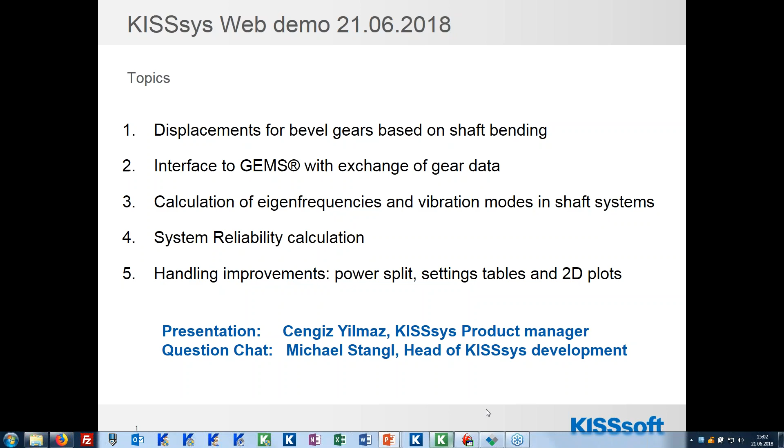So now I would like to start with the first point, displacement for bevel gears based on shaft bending. If I go to KISSsys now, let's open the single bevel stage model. Here you can see, if I go to boundary 1, this is the input boundary where we have the pinion shaft. I have here a speed of 1000 RPM and a torque of 50 Newton meters. So in total, I give a power of 5.236 kilowatt to this gearbox, to the pinion shaft.

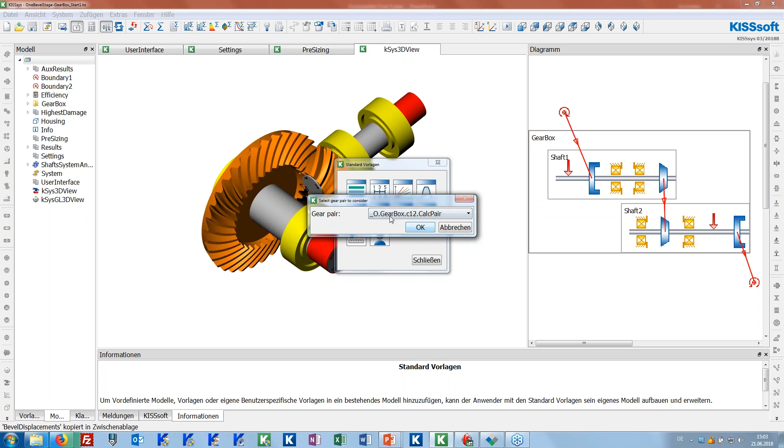And now I would like to calculate the displacements which are resulting just from the bending of the shafts. To do that, we have a new template under the standard templates in KISSsys. You can find it here. It's a new icon, which we can just load into our model tree. The first window appears to select the stage which you want to consider. Since we have just one bevel stage, we can select single bevel stage from the list. And the selection here can be closed.

And then you will see an interface like this. In the first part, in a header, you can set the graphical settings. This means draw the deflection lines. If I say yes, this will create the deflections in the actual 3D viewer. Then you can scale these deflections with a scaling factor, which you can set here. And there is the type for the values. You can have either the Gleason standard EPG values or the Klingelnberg VHJ values. And according to your selection, we convert these values below. So let's switch back to Gleason EPG.

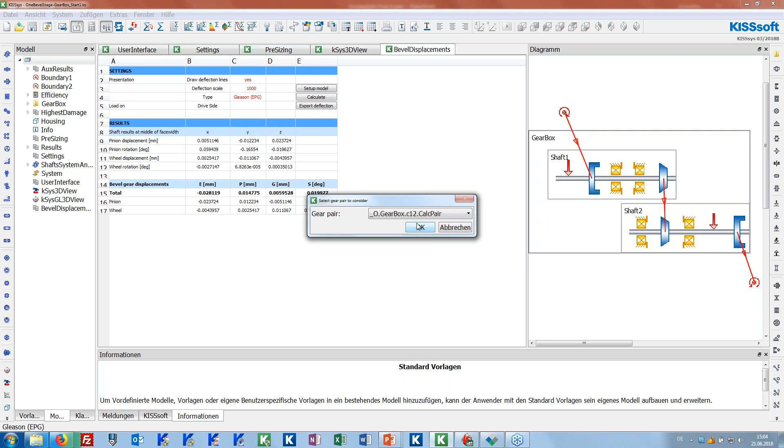And again, if you did a wrong selection in the beginning, you can select the stage again here. And with the calculation, you can run the displacement calculation now. It's not changing because I already did it before. So what we can see in general is, for the different shafts, in X, Y, and Z directions, the displacements for the pinion shaft and for the wheel shaft, and also the tilting around the X, Y, and Z axis. And these values are automatically converted to the EPG values according to the sign conventions. And these values are ready now to transfer to GEMS, for example.

Now, just a short additional information. What does it mean if we take these X, Y, Z values? From where do we take them? If I go to one of these shafts, let's say to the pinion shaft, here it's already written that it's the results at the middle of the face width. So, just to make it clear, if I open the shaft calculation, we have the middle of the face width of this bevel gear, and in the center of the shaft, we check the displacement of this point in X, Y, and Z direction, and also the tilting at this point around the X, Y, and Z axis.

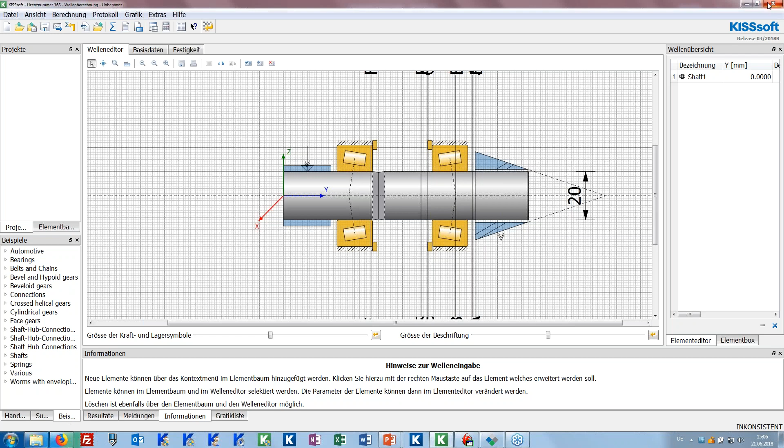Okay, then if you check the 3D view, since we activated here the deflection lines, you can see with the scaling factor how it would deflect. We can see clearly the pinion shaft deflection and also a bit the bending of the wheel shaft.

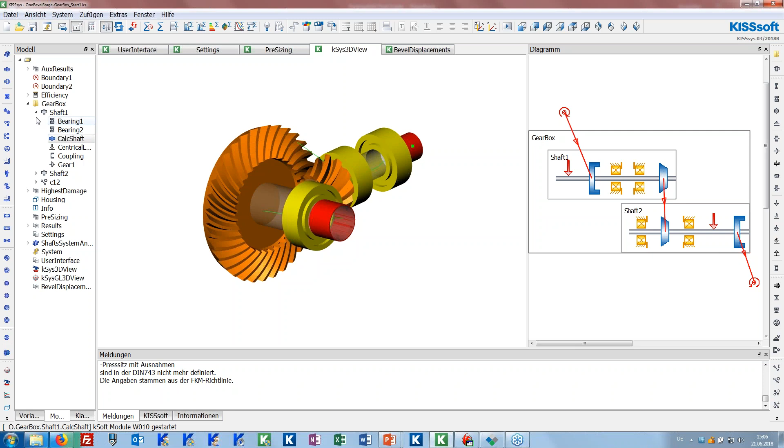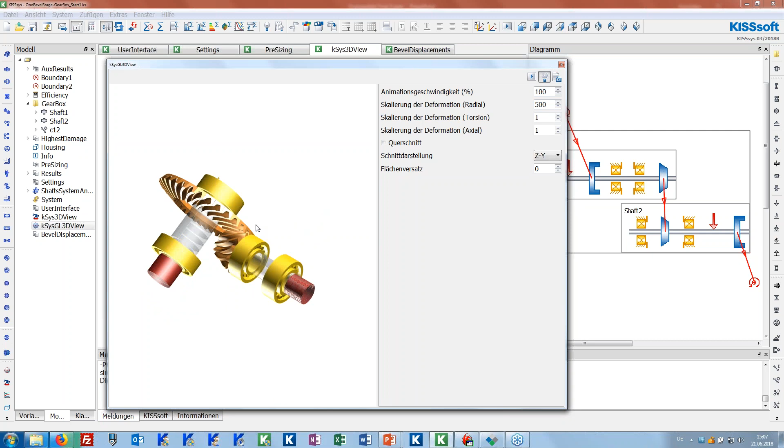Let me show it in the new 3D viewer as well here, which is a bit easier to handle. So in the properties of it, I can activate, for example, the radial displacements. So you can really see here this shaft, and also if we have some axial displacement, you can see how the shaft moves axially as well.

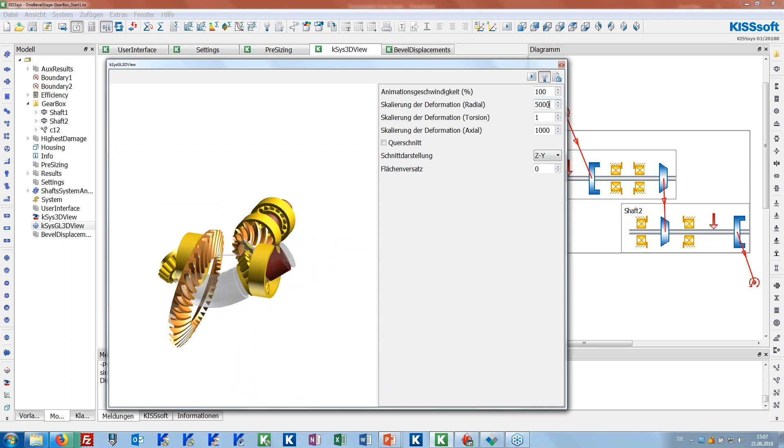Maybe 1,000 times. So this creates really big. Yeah, we can see the bending here clearly. Okay, that's regarding these bevel displacements. For sure, if you would change temperatures of the housing now, you would see the effects as well here in these displacement values.

So, as I mentioned before, these displacements are needed if you want to do the contact analysis maybe in GEMS for a bevel stage. And now I come to the second topic with this introduction, which is the interface to the Gleason software GEMS. In GEMS, I already started here the calculation software from Gleason, and if I open the sample job here, which can be the hypoid stage, for example,

Then you will see from that hypoid stage the geometry values, and I exported already a predefined file here from GEMS, which I would like to import to KISSsys. So to do the import, first of all, you need to add the template related to this for this interface. You can find it on the standard templates here.

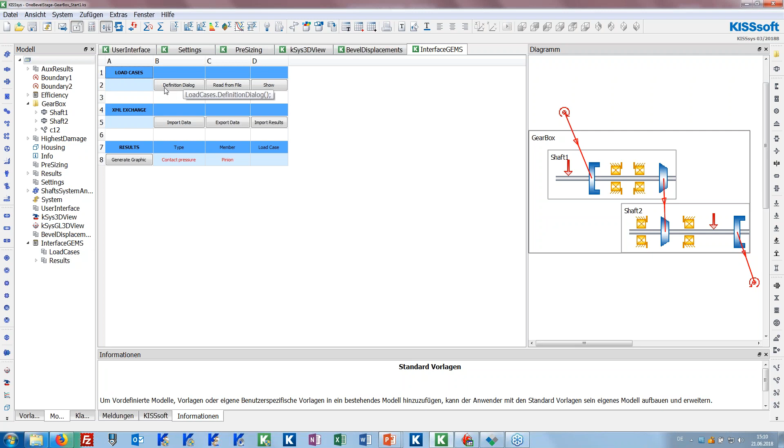If you don't have the bevel displacement template before you add it, then it will automatically also create it together with the interface GEMS template. And first of all, we have to define the loads here in KISSsys. So that's the first thing you have to do. We have the two bins, for example, absolute values, hours, and the speed is defined at the pinion shaft, the torque as well.

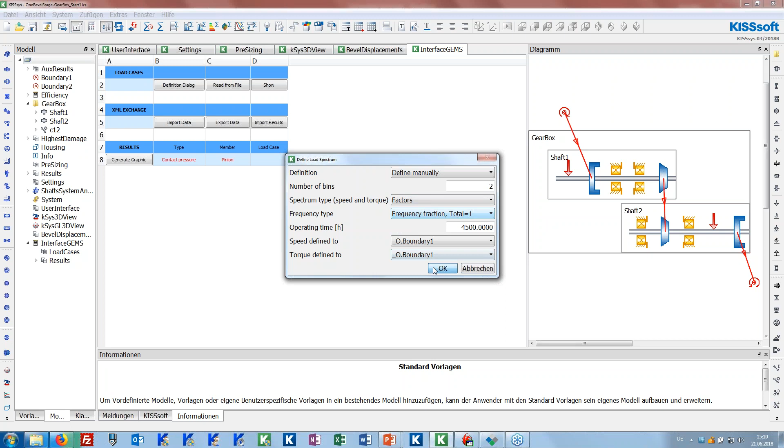And let's say I would like to use factors and fraction from the total lifetime. Okay. And I have two conditions. For speed, I say speed and torque. I use the same input conditions with factor, just multiply with factor 1. And here for the torque, I use the coast condition. That's why I would like to have the negative speed and negative torque. And for the drive condition, I have the positive values.

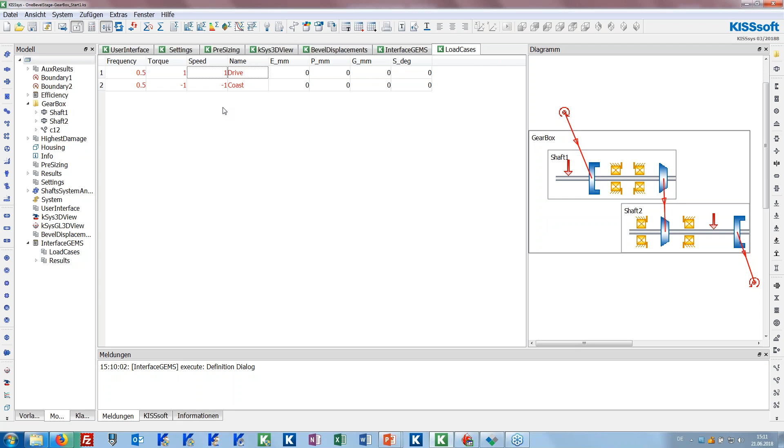So this is just to check what happens when different flanks are in contact and different flanks are driving from the pinion shaft. Okay, so these are our loads, drive and coast conditions. And the next thing would be the exported data from GEMS to import it to KISSsys. So I already have an exported example from GEMS.

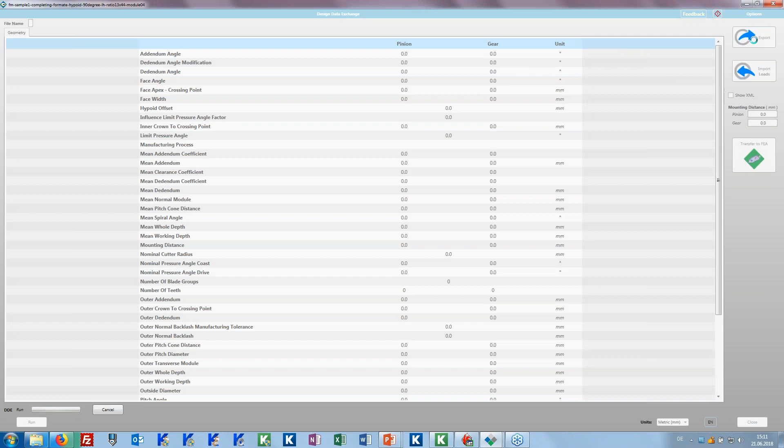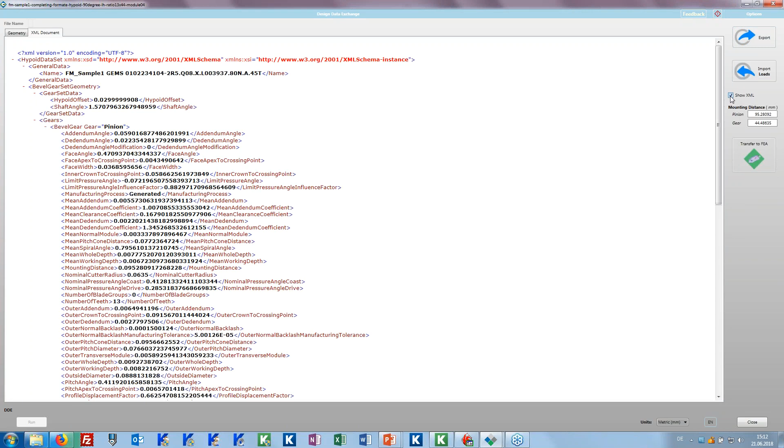This is this one which I just exported from here from the design data exchange tool. I did an export from here already, which we could also do again. So this is this one actually. I already did the export. So you can also see how it looks in XML format, this example from GEMS. And now I have to import it to KISSsys.

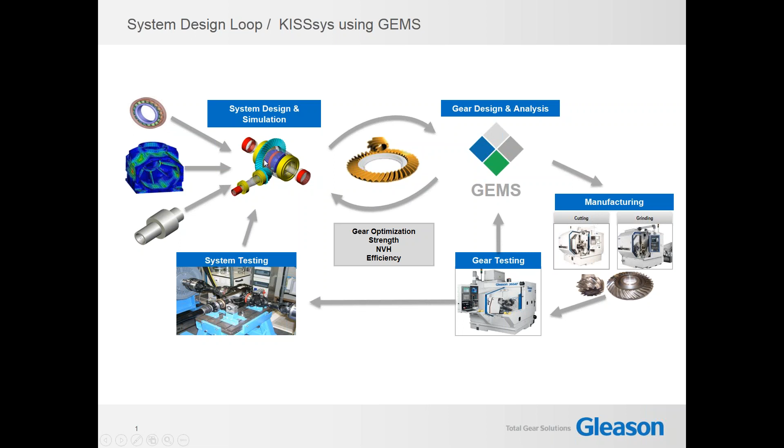And I would like to just show you now, we exported the geometry at the moment from GEMS, and I would like to import it to KISSsys and do the calculation and export it to GEMS then. So here I would like to import this data from GEMS. And this is, let's say, the exported file.

And you can already see it can be that some settings in KISSsoft have to be changed accordingly, because now I'm importing a hypoid stage and my model was not ready for this stage, so some parameters have to be changed. So here it's the calculation method, and I just say okay, yes.

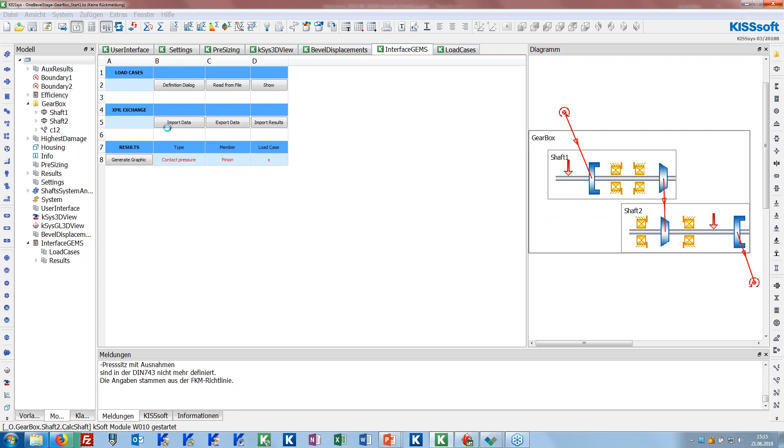And what's happening now is KISSsys is reading in this data, doing the calculation with the defined load cases, and exporting also automatically the load cases together to this file in an XML format, as you see here in the message.

Maybe let's switch to English, it's much easier to understand for you.

So now we exported this data, and I can go to GEMS and import the loads again back. This is the same file which is overwritten from KISSsys together with the loads. And if I import this file, I can find back the loads here as well. And I can run here the contact analysis in GEMS. So I can start the calculation, but this can take some time depending on the number of load cases.

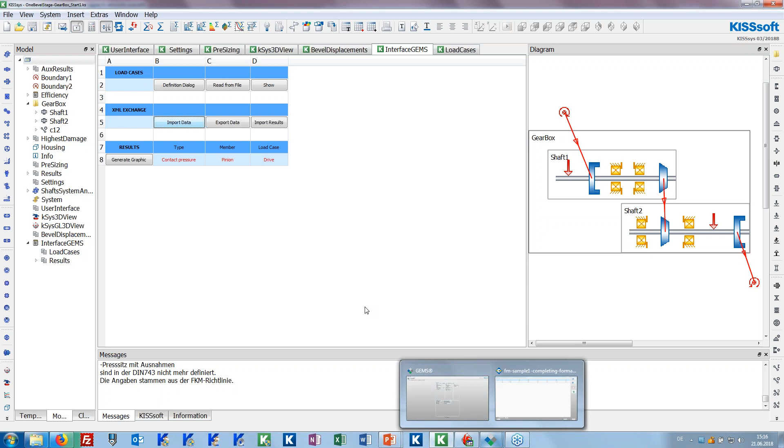I have already a result file created, which I can already import to KISSsys. So it depends always on the geometry and on the cases. So to make the time shorter, I would like to import the results from an already calculated file, which is the same geometry, just calculated before. And for the import of the results, you can go to import results in KISSsys and check here the exported XML file, which is coming after the calculation in GEMS.

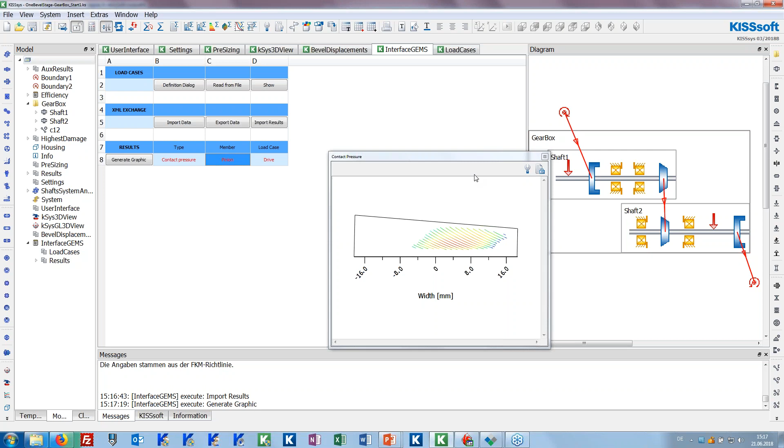And we have some graphics generated automatically, which you can check here with generate graphic. First of all, we can see the contact pressure either from pinion or from the wheel, and for the different load cases like drive or coast, what we defined here in our load cases table. So let's check the contact pressure on the pinion. This is on the flank for drive condition of the pinion. Then if I check it for the wheel, it looks the following way.

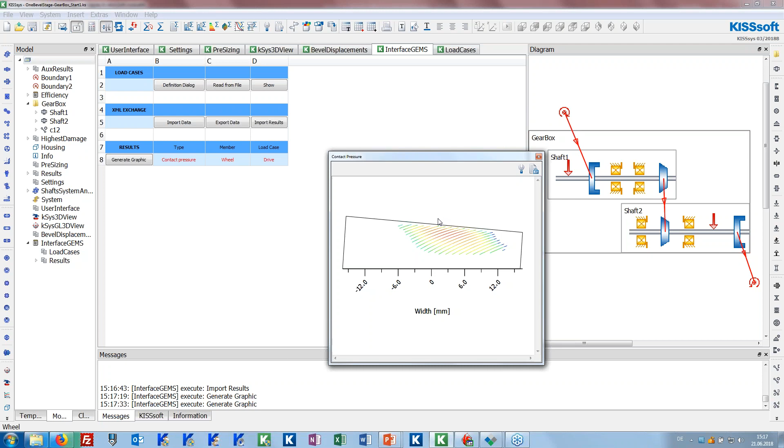And it's again important to mention these loads which we had before can be a bit too low for this geometry. This is just to show you a bit how the communication works and what is possible for this interface.

And another point is we can show the sliding velocity in 2D, or, which is also interesting, the mesh stiffness or the transmission error here at the last point. Maybe we can make it bigger for the wheel for drive condition here over the mesh, and also the same for the pinion for drive condition. And let's check the coast condition. Yeah, looks slightly different.

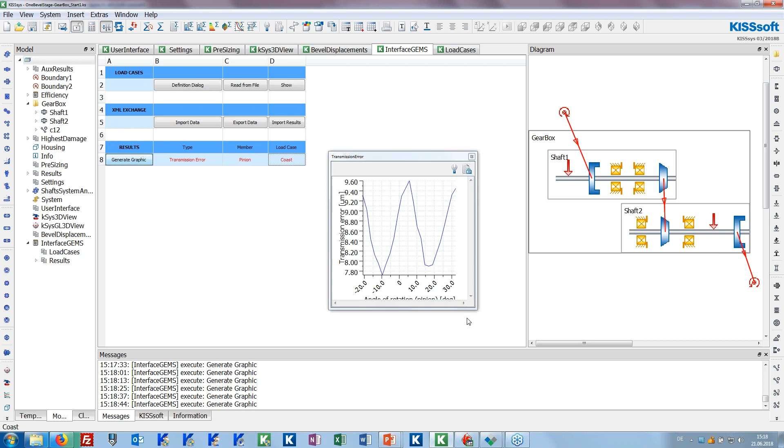So that's actually what we mean with the interface between KISSsys and the Gleason software GEMS. As you see, there are many possibilities. You can also just define the geometry in KISSsoft and export the loads, and then do the contact analysis again in GEMS. Or you can also do it the way we did it.

You can import the load from GEMS to KISSsys and do the calculation by exporting the loads to GEMS and importing again the results. The motivation for this example is that it's a hypoid stage. We cannot do the contact analysis of a hypoid stage in KISSsoft, but with this interface, you are able to export it and do the contact analysis in GEMS and check the results again in KISSsys.

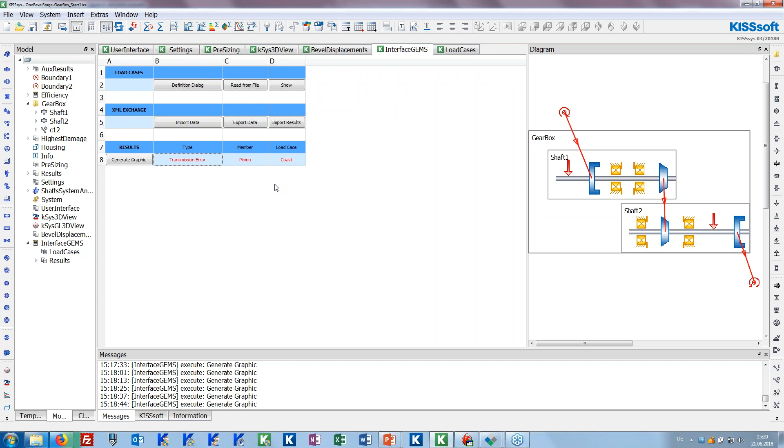Then I would like to switch to the third point, which is about the calculation of eigenfrequencies and vibration modes in shaft systems, where I would like to open one of the example models here, which will be a 4-speed transmission gearbox, so that we also have something for the automotive industry.

This will be a 4-speed gearbox where we have the second speed in, so we will see details in the model. I would like to show you the modal analysis of such a system. We also have 2 other points we could show, but these functionalities are in beta state. So I would like to show you just the modal analysis; the forced response and the generation of the Campbell diagram are in beta state, so they will not be shown today.

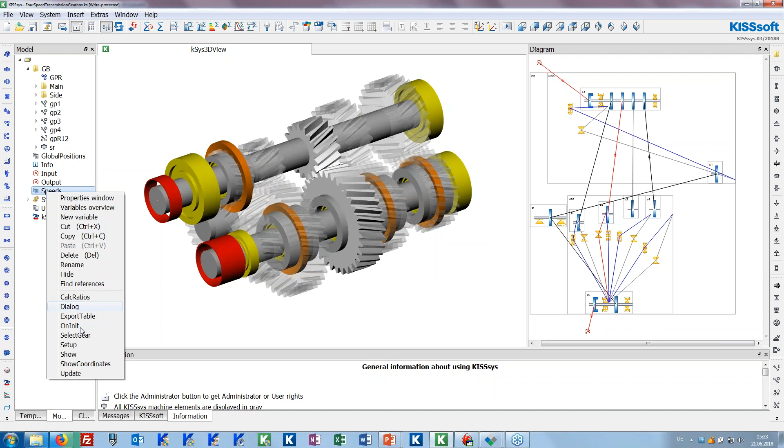So here again we have the 4-speed transmission gearbox. Let's check the loads: we have 47 kilowatts here, 3000 RPM, 150 Newton meters, and at the moment gear number 2 is in, it's this stage. Now I would like to do the eigenfrequency calculation, the modal analysis of such a system.

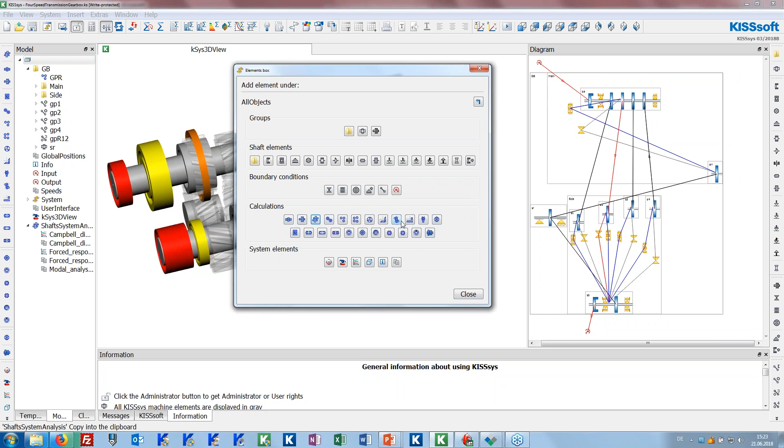You have the option to either use the calculation elements on the left hand side here and drag and drop them to the root directory, or you can go to the element box, check the calculation elements, and find the KISSsoft shaft system here. I will just click on the root directory and click on the specific element to add it to my model. I close it, and now to perform the modal analysis, we can right-click on this element and just use modal analysis.

I would like to calculate the first 4 eigenfrequencies. Regarding the meshing stiffnesses, you have the option to take them from the ISO calculation, or the detailed option to use the contact analysis results, or you can say the meshing stiffness is infinite, or not take into account the stiffnesses of the meshes. So let's use the ISO calculation as a reference, and I would like to also see the axial and bending modes, not only the torsional vibrations. Gyroscopic effects I would like to neglect at the moment.

Okay. So then the software is starting the calculation. Depending on what you selected here, this can take some time. If you calculated just the torsional vibrations, you would have it in a couple of seconds. This can take around half a minute now because of the coupled vibrations, because of the bending and axial modes in addition.

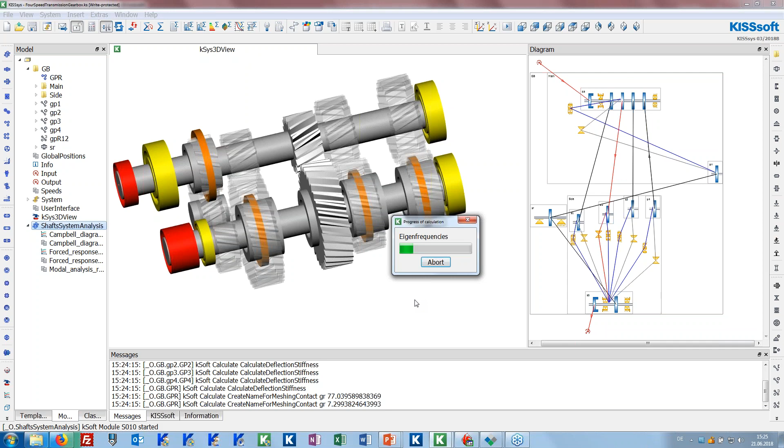The model we use in the background includes the inertia and stiffness of the shafts, the stiffness of the bearings, and the gear inertia and meshing stiffnesses of the gears. All together it is vibrating, and we are calculating the eigenfrequencies of such a system.

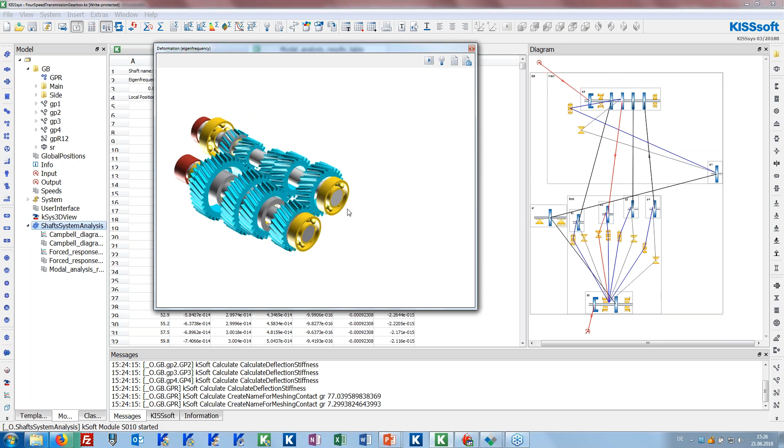So calculation is finished. And the first thing we can do is check it visually in this 3D viewer. And if I open the settings of this 3D viewer, I can show you the calculated results here. So the first is a gear body vibration. Then this is the first mode. Then second mode is

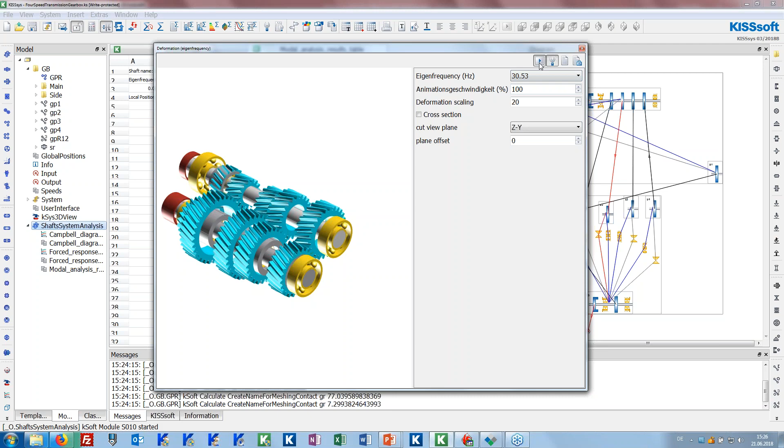we have 30.53 Hertz. And let's check what we have here. We can see that we have just the torsional vibrations here mostly. Even if I do the scaling, put it higher, so it's more torsional. Quite less bending here maybe, but in general it's more torsional vibrations.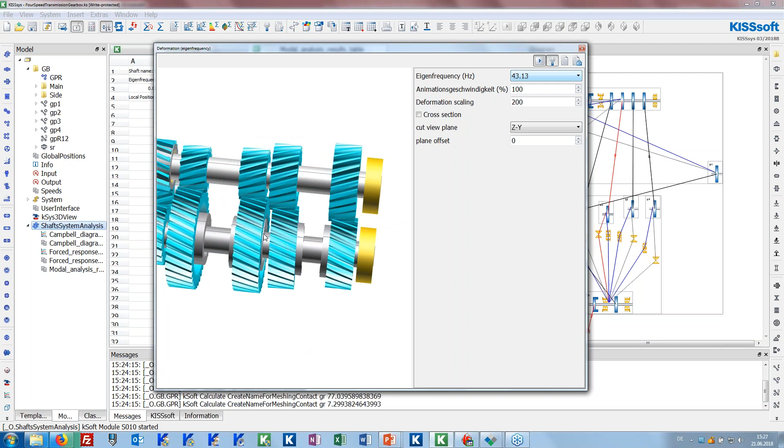Then let's see the third eigenmode, eigenfrequency. So we have here the bending is stronger for these gears, and in general we have torsion and bending together. For the last one, similar, but the bending mode is stronger here for this gear. Okay, so this is something you can analyze graphically or in 3D.

And then what you also have is the amplitudes of these different modes. So we have for the different shafts and eigenfrequencies, over the shaft, the different amplitudes. So the displacements in x, y, and z direction, and also the rotation around this axis. So you can plot them manually if you like. We have also some plots.

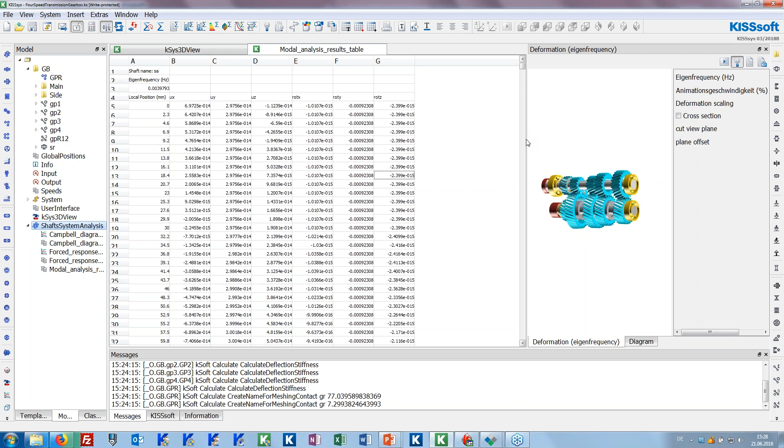We can also create the plots automatically here, but I would not like to start this plot generation at the moment, which takes also some time. So what I would like to show you is also the summary report of this modal analysis calculation. So I don't start the 2D plots, but the report in general.

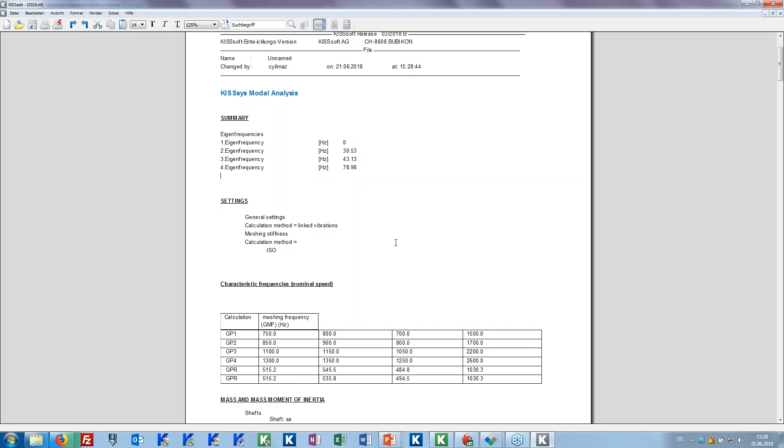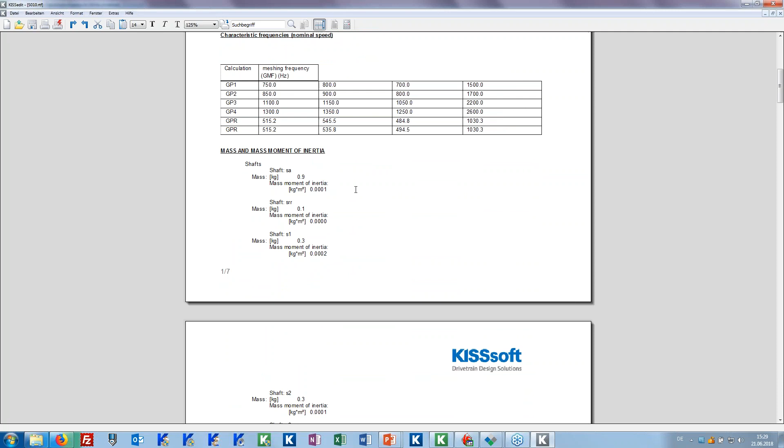And if I make it a bit bigger, you can see here the summary, which we already have seen in the settings of the 3D viewer. We have the eigenfrequency values there. Then we can see the characteristic frequencies for the different pairs. Then we have the mass and moment of inertia for the shafts and for the gears.

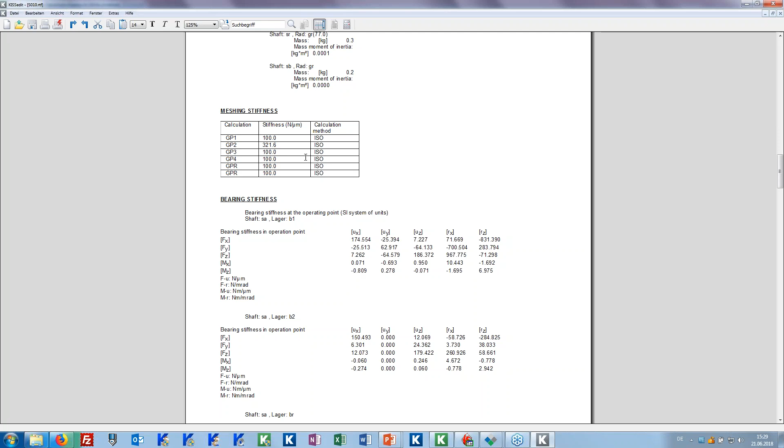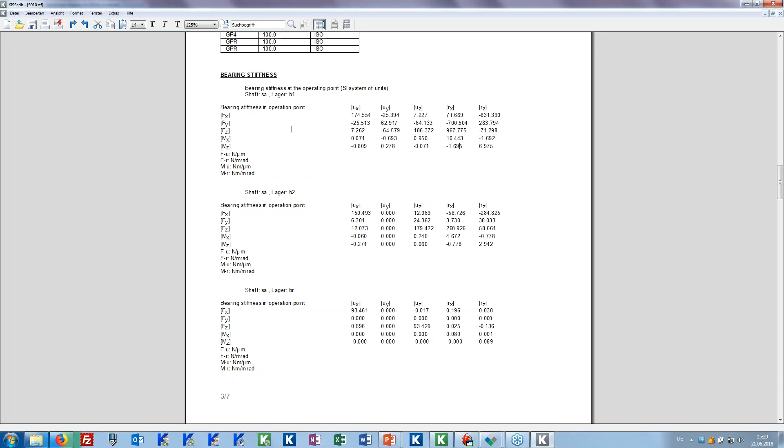And then the calculated or used meshing stiffnesses from the ISO, as you see. And if you calculate the bearings with the inner geometry method, you will see the stiffness matrix for the bearings in operation point here for every bearing which is used in the calculation.

And at the end, you have some information about the modal energies, which means if you have the different modes, the bending, axial, and torsional modes in one eigenfrequency, you can check which one is stronger than the other. So it's a non-unit value, just to distinguish which mode is stronger than the other one. Okay, so this is again the general report for this modal analysis calculation.

As I mentioned in the beginning of this topic, we have the forced response and also the generation of the Campbell diagram. These two functionalities are in the beta state, and we did already some explanation during another web demo where we showed for 1 hour the system eigenfrequencies calculation, which was shown by Mr. Zotos. So you can check our YouTube channel to get more information about these as well. The forced response and the Campbell diagram functionalities are still for free.

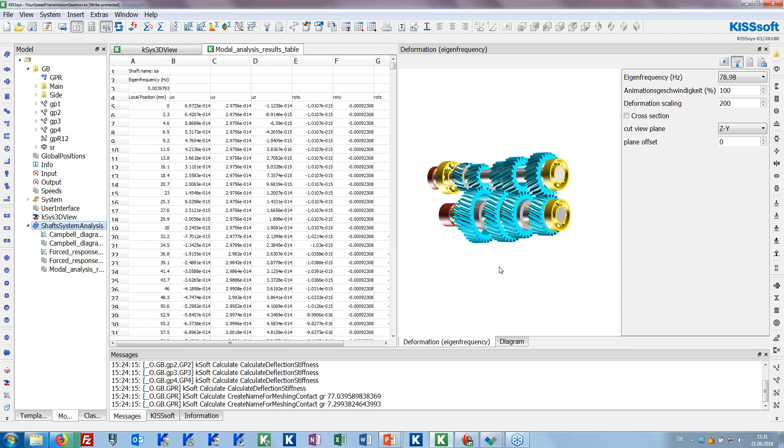So next topic is the reliability calculation, system reliability in KISSsys, which I would like to do also directly in this model without changing the model. So if I have the same gearbox and I would like to check the system reliability, there is a new icon here on the top in between the different calculation icons.

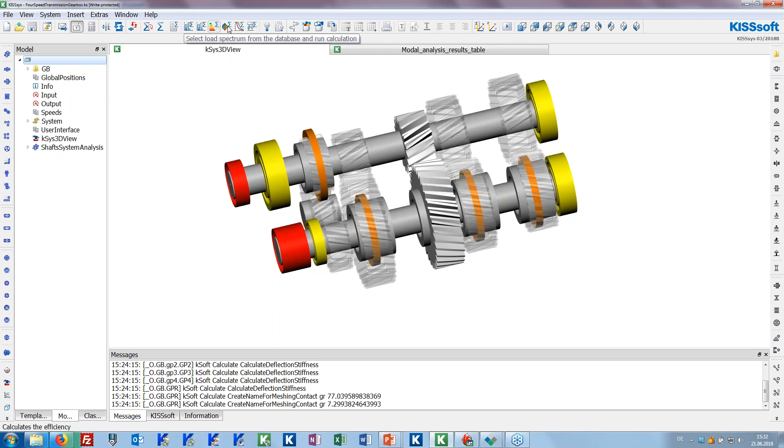You just have to click on the calculate reliability button, and if you like, you can define the range for the service life from minimum to maximum for the plots, or this is also created automatically by the software in order to get the range which makes sense. And here let's use a logarithmic graph for

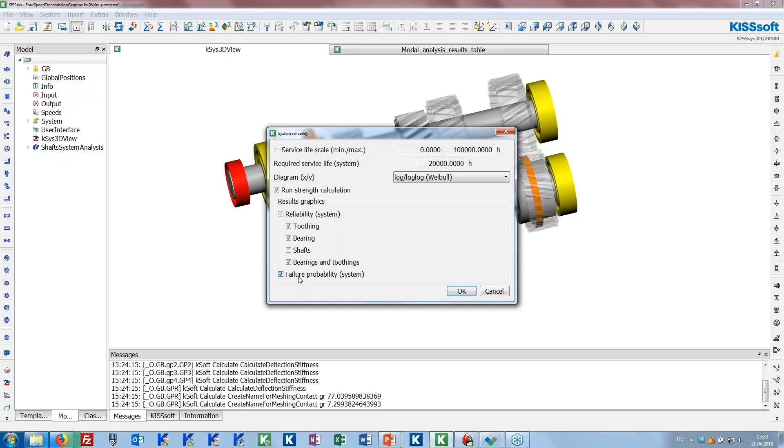the plots, and I would like to see the reliability of the toothing of the gears, the bearings, and of bearing and toothing as a subsystem, and also the failure probability of the system. So reliability of the system is by default active, and you can additionally activate the failure probability of the system. So let's say OK.

And KISSsys is calculating now the reliability. Maybe a short comment: this reliability calculation is according to a theory from Professor Bertsche, who is from Stuttgart, Germany. And the idea here is that we convert, especially for the gears, it is very important that we convert the safeties into lifetimes as hours using a Weibull distribution.

For the bearings, we already have some lifetime information from the standard, but the main problem here is the failure probability of the different components in our system. So, for example, for bearings, we have 10% failure probability according to the standard, and for the gears, this is around 1%. So, to make a plot where we can compare all elements, we need to do some mathematics, and there we use a Weibull distribution for that.

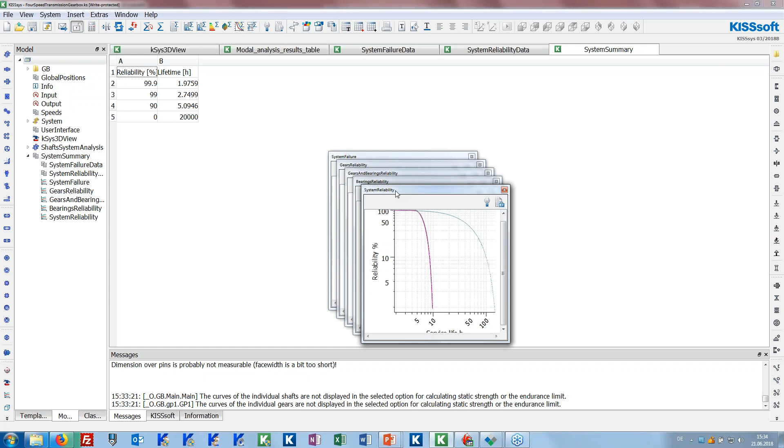And these Weibull parameters you can also adapt on the KISSsoft side. This I would like to show you at the end of the demonstration. So first of all, here in this model, we calculated the different plots which we just marked before. So I have the system reliability. I would like to put them all on top of each other so that I can go step by step. So I go to the system reliability first, and I open the legend here.

So what I can see here is I have 100% reliability for the first 2-3 hours. And then it drops down for the bearing. So we have here the bearing subsystem, which is the dotted line in cyan color here, and the gears, they seem to be okay in the beginning, up to around 4 to 5 hours, but then it drops very fast, and this dashed dark green line is

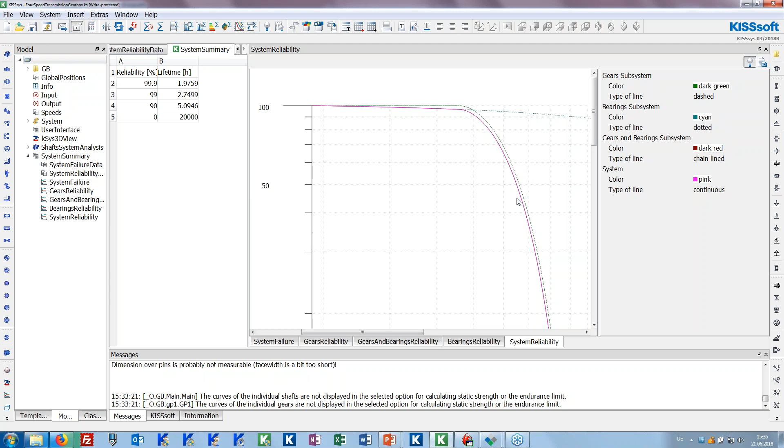the gears, and we can really see nicely that already after 5 or 6 hours or less, we have just 50% reliability left. So it seems that first the bearing is the most critical, but if I run the gearbox longer, the bearing still stays at 90%, but the gear is really going down very fast to 50% reliability.

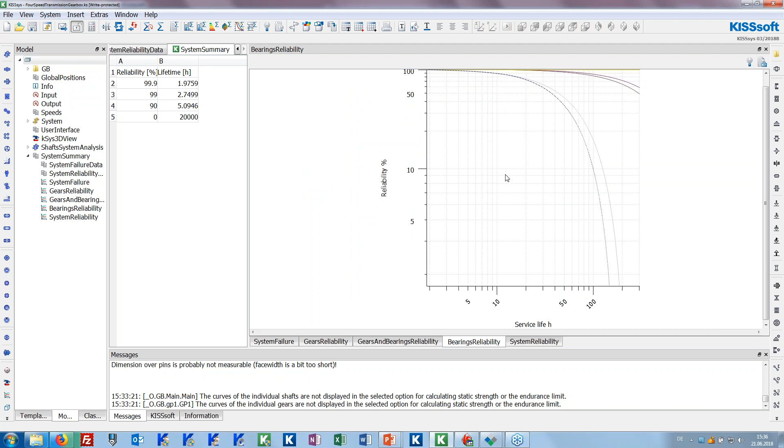And now the idea is to see which gear or which bearing is really limiting my life. For this, I go to the different specific graphs. So it seems to be in this range. This is the total system. The dotted is the bearing subsystem, and which bearing it is, I can check the closest one, which is the light gray, it's B1. So for B1, at around 20 or 30 hours, I reach 50% reliability.

But if I check the gears, this is much worse than the bearings, and this is also the first information which I get from the system reliability: the gear subsystem is in this range, and the gear failing first will be G1, which is dark blue here, the continuous line. This is exactly the same information I could see from the system reliability, that after 5 or 6 hours I already reach 50% reliability.

So it means that my gear G2 on SA is limiting my life first, and the second one seems to be either this gear, the bending failure of G2 on S2, or the bearing B1. So these three elements I have to check more, and maybe I have to make some changes. Maybe I have to replace my bearing, or I have to change the design of the gear to reach a higher lifetime there.

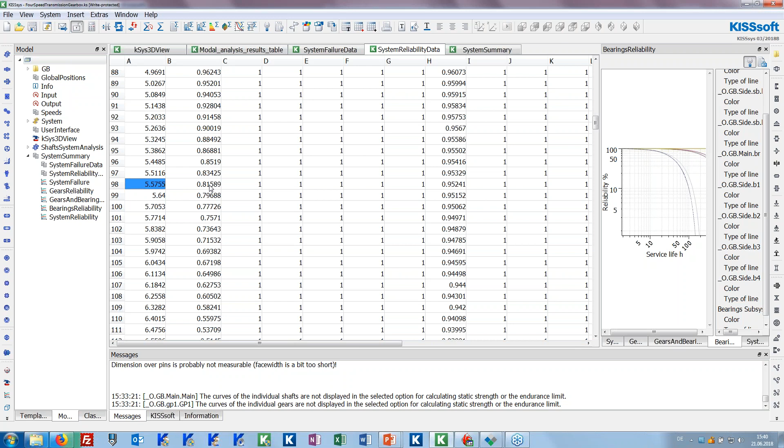So what we can see here exactly is this gear. For this gearbox, if you want to have 80%, you can just run 5.5 hours, for example. If you run longer, it drops very fast down with the reliability. So that's it actually regarding the calculation and regarding the results.

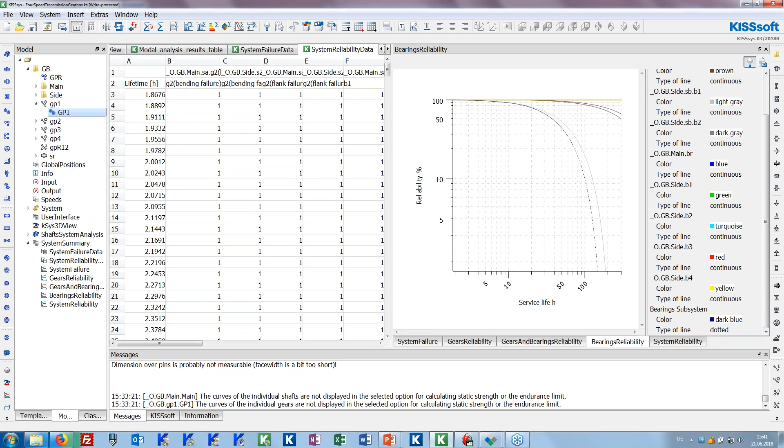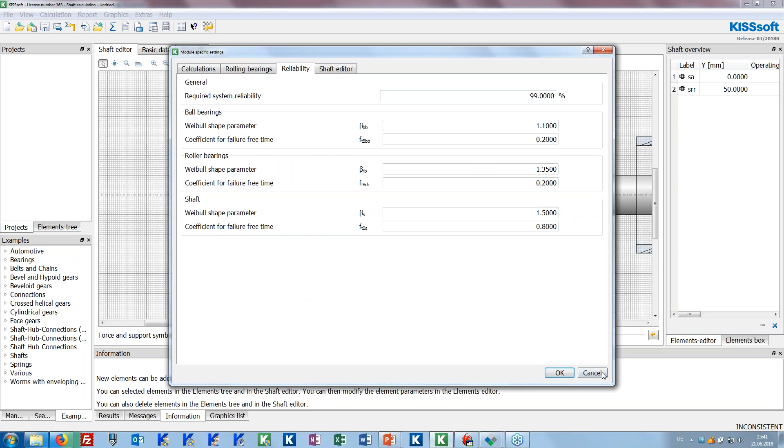I mentioned the Weibull parameters when I explained the functionality. These Weibull parameters can be checked in KISSsoft as well in the gear calculation under the module specific settings. Here we have a new tab, reliability, and here they can be adapted. At the moment this was not in, so that's why it was -1. And for the shafts it's the same actually. Here in the module specific settings, reliability, you can see the Weibull shape parameters. Again, they can be adapted accordingly if you want to use a different one from the one which is proposed by our software.

Okay, so again, if you have questions to this topic, to this functionality, just feel free to ask. Mr. Stangl is ready and would like to help you there as well.

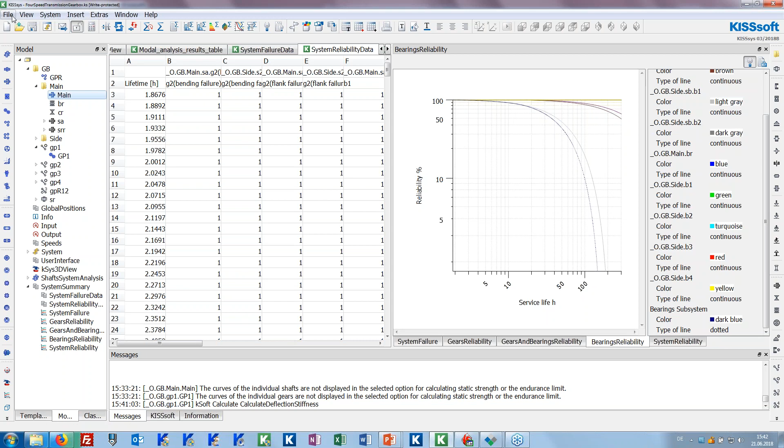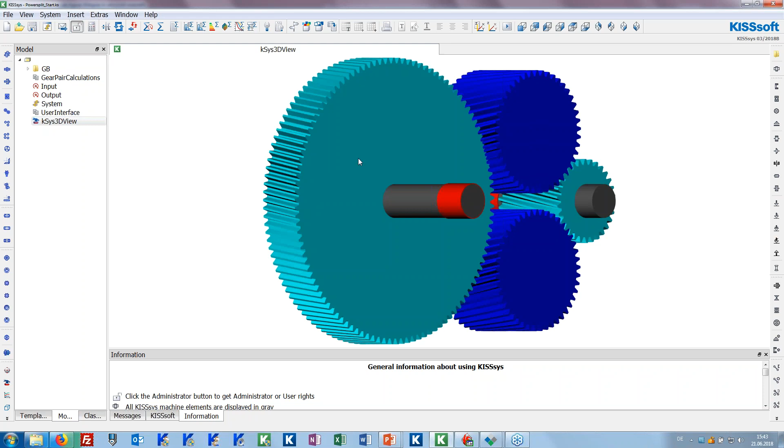So now we reach already the handling topics. We already finished showing the system calculations. So now I go further to the handling, and I would like to show you first maybe the power split kinematics. So let me open one of the models which I prepared. No, this one. So power split model, which is the basic power split model, which shows such a standard or characteristic kinematics where you have one input shaft or input gear, which is meshing with two gears, and then it comes again together to one gear. So this is just a representation of such a system. For sure, what happens in between can be much more complex in reality, but this is just to show you the principle.

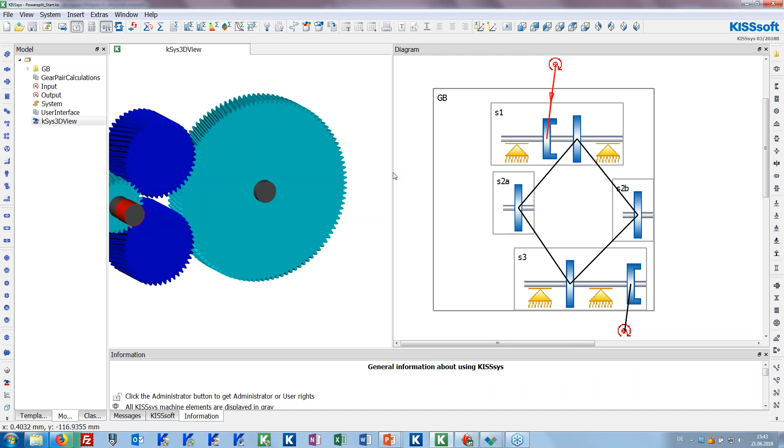If I activate the 2D view now, if I run the kinematics in this way, it's not possible. For sure, we will get the error because it's not clear how we distribute the load to the different paths, the power paths. So up to now, you had to manipulate the kinematic calculation by creating own defined functions in ClassCAD, and then it was difficult to adapt if you did some changes later and so on. So all these steps are not necessary anymore. We made it much more simplified.

If you go to system, we have a new function there which is called define power split. This is just an information that in some of the complex models it may not work already, but we are happy if you can send also the most complex models to us, where you have power splits, to extend our functionality here. Okay, and then I say I have 50% distribution from the left to the right side.

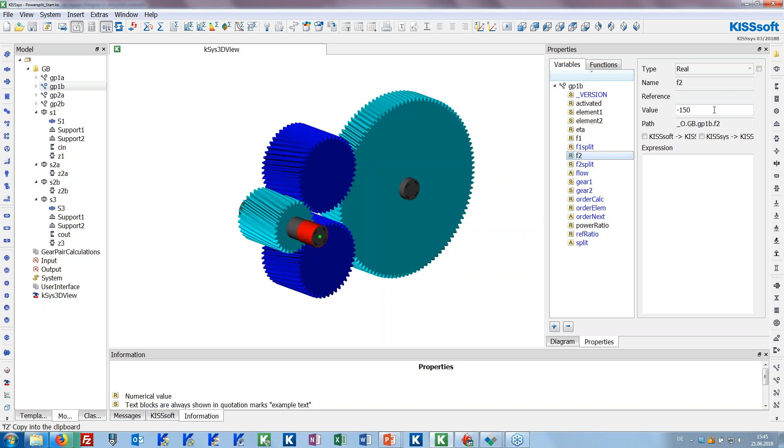So here we can see that the kinematics can be calculated automatically, and I could also check the different load values. So GP1A is this path, GP1B is this path, and here F1 is the torque on the first gear, F2 is torque on the second gear. The same here, F1 torque on the first gear, F2 torque on the second gear, and we see that they are the same for both paths. So this is one of these cases where you need this power split functionality, which is now much more simplified.

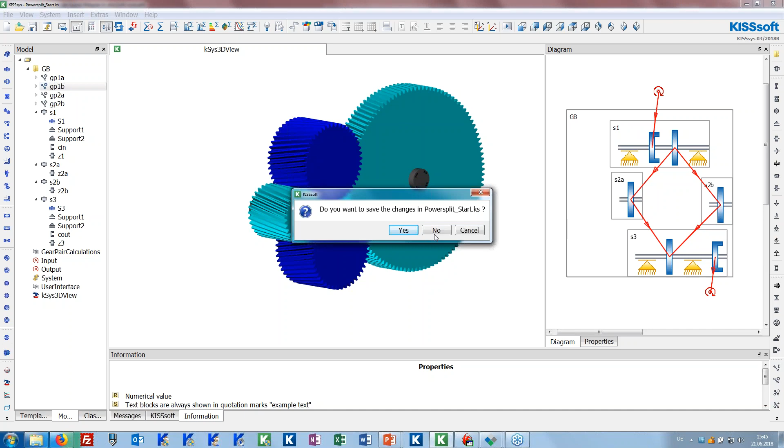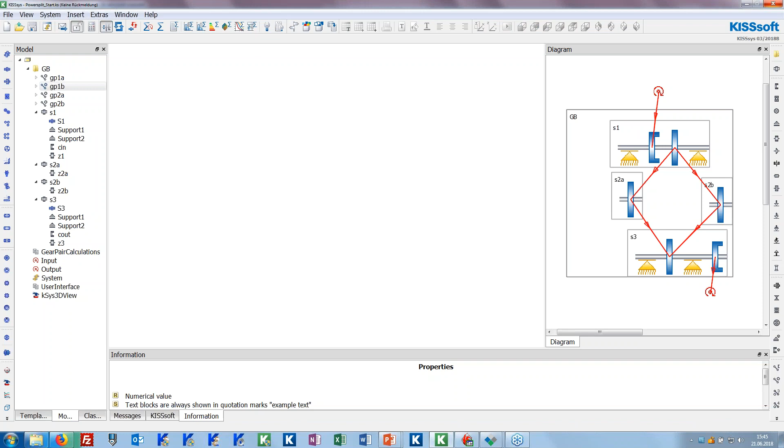And I have also another model which is a bit more complex, just to show you that it doesn't just work for cases where you have one gear meshing with two gears. It's also working if you have one direct path, like this model here, and then a split again. So now for this model, the system actually did it a bit fast, I think.

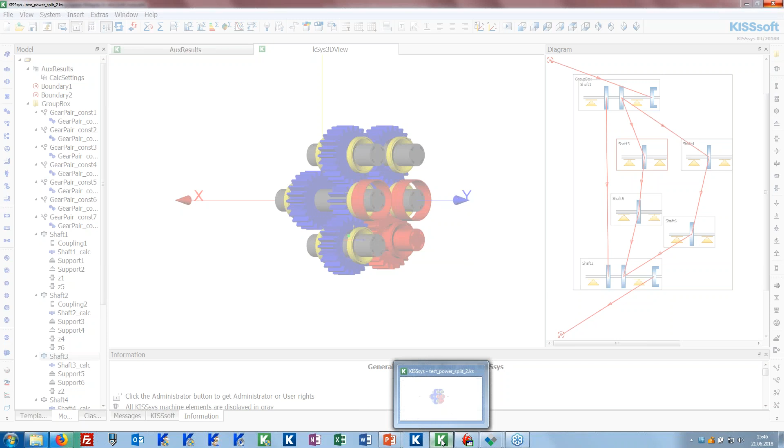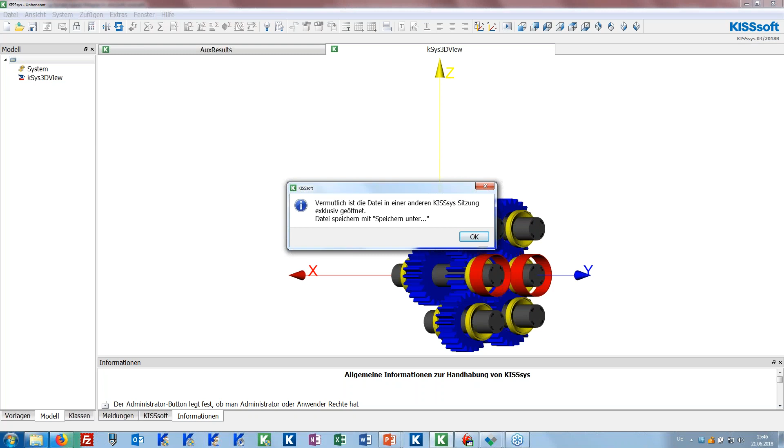I was too fast with the 3D viewer there. Okay, let's start it again. So, okay, let's start 3D viewer. Yeah, so it's not just here the basic split where you have one gear meshing with two gears.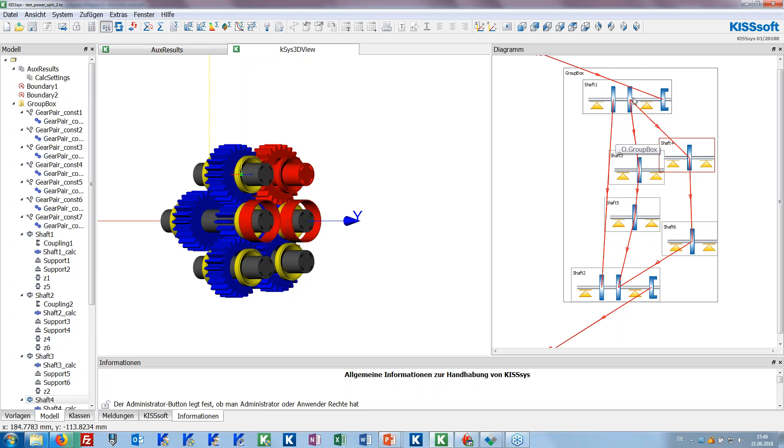It's also here a direct path, and we have to define here at least two times. So you have to define this split here between these two paths, and then here internally again this split here. And this is also working here in this model. If I go to define power split,

and this is for the first split here between this and this path, let's say 50%, and here I use 25% of the total load here and 25% here for the other two remaining paths. Okay. And then it can be calculated. I could also use different proportions of the loads in different paths. This is just to show you that in different situations this new functionality can be really helpful.

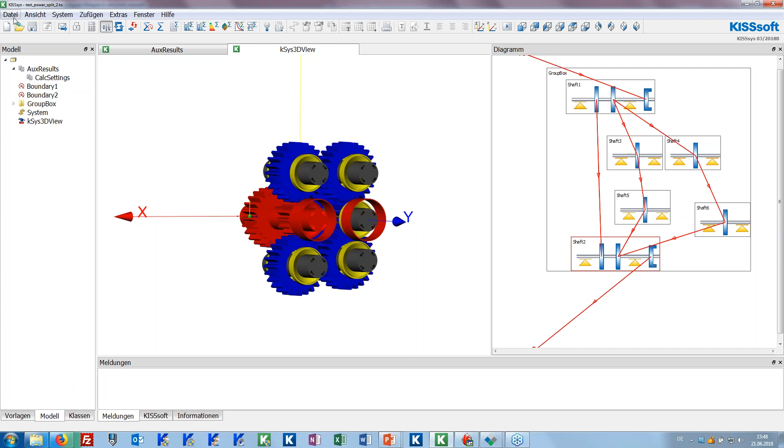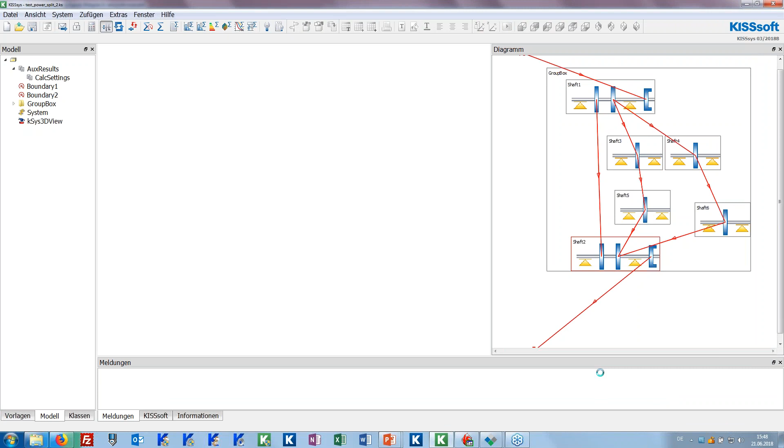Okay, next point is the settings table, actually. And for this, I would like to open one of the prepared models, simple two-stage helical gearbox. Okay. And here I would like to add the settings table from the element box. You can find the settings table. I will explain to you shortly what it is.

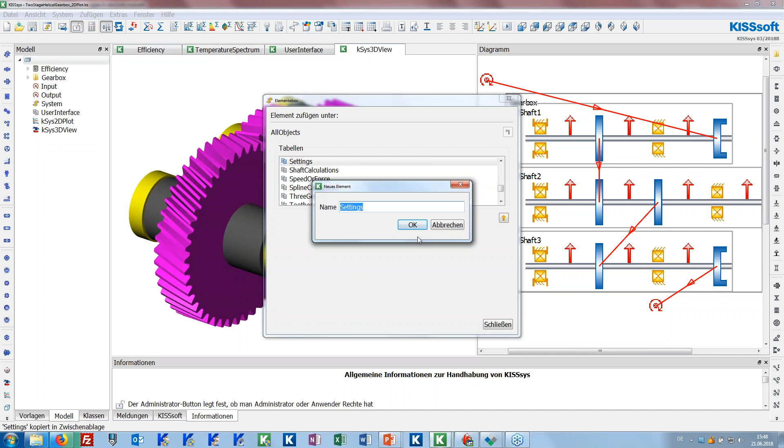This settings table can be really helpful if you want to define the global settings in a system, like for example the lubrication settings, the lubricant temperature, or you want to define the material for every element in your gearbox, for the gears, for the shafts. Here directly the system required lifetime, calculation methods at one place, the temperature settings on the shafts, bearing friction, and some additional required root or flank safety for the gears if they are not depending on size, and so on.

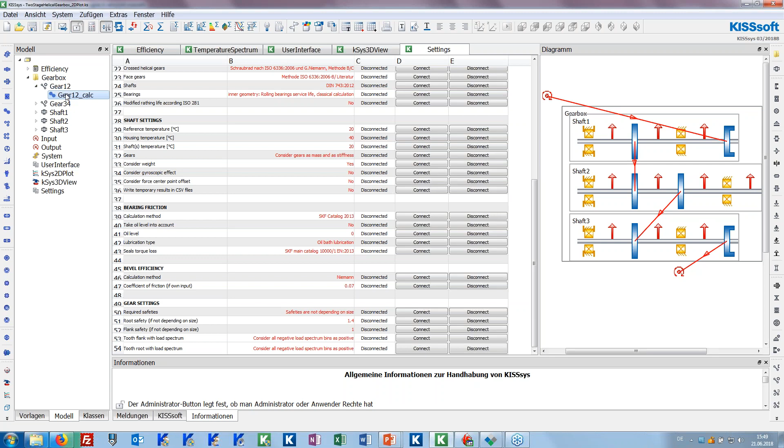So this is our definition, how we create this table, but it's also new now that it's possible to extend this table, or you could also delete some lines. What you have to know is that you have here a variable which is already existing in one of these calculations, or in all of these calculations. It depends on where you want to control it. So let's check here. Let's make it again to English.

So if you go to the properties window of this calculation, you have different variables, and there is an ambient temperature variable, AmbTemp, which is nowhere controlled here in the settings table. But now what we could do: we have this variable also in this gear pair. So in every gear pair we have this variable, and we would like to control it globally.

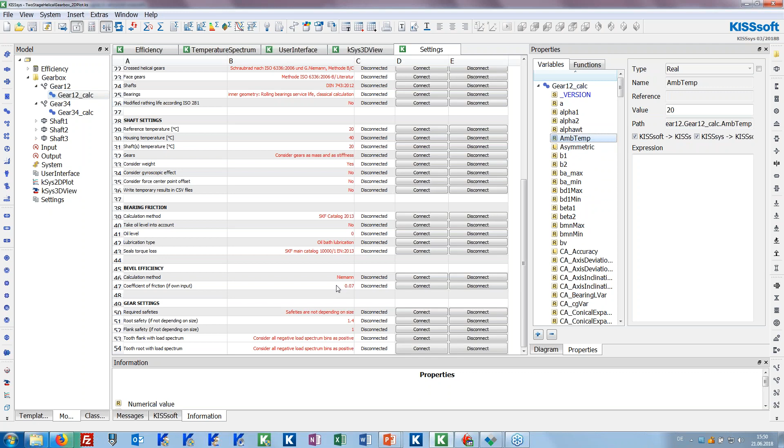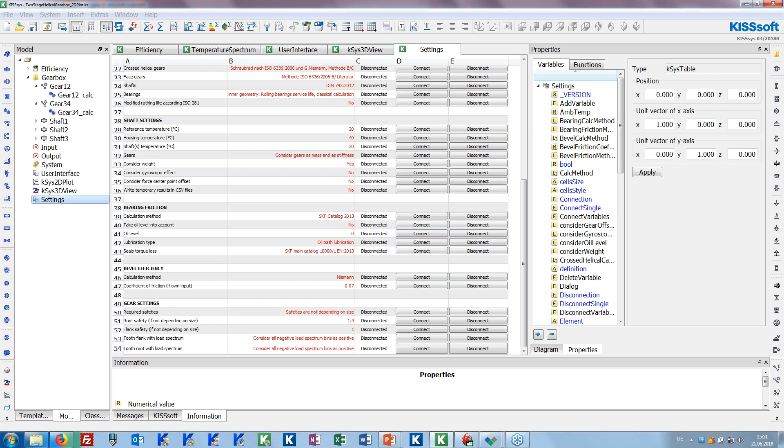What you can do now is just go to Settings table, right mouse click, and here add the variable, and the variable name is AmbTemp actually, like in a gear pair, and the table entry name, the name here on the left hand side, can be ambient temperature. Okay, and we can see that it's automatically added as an additional line here in the table. So if we check this variable, it's now disconnected.

So if I say, okay, I would like to have 30 degrees and I would like to connect this variable for all existing elements in my model, then I can go here and check it's automatically set through this expression, and it's set to 30 degrees. The same also for the second calculation. So in this way you can extend your settings table as you like.

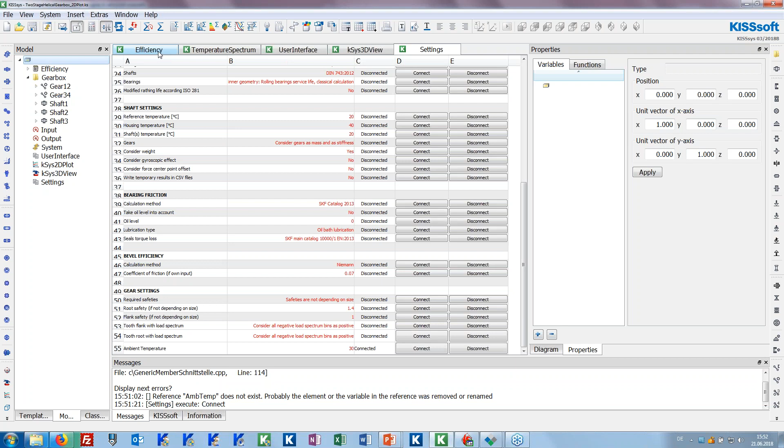Okay, then the last point regarding the handling improvements. Most of you maybe never used it. We have also the option to create 2D plots in KISSsys, and one of the best examples, where it can be really helpful, is if you did the efficiency calculation and you calculated a temperature spectrum, so the temperature change of the oil in your gearbox over time, and you would like to plot this in a 2D plot.

For sure, this is possible to do in Excel, but the motivation why it's nice to do it in KISSsys is that you have the information already here in the same interface, and if you change the values, it will automatically update in KISSsys.

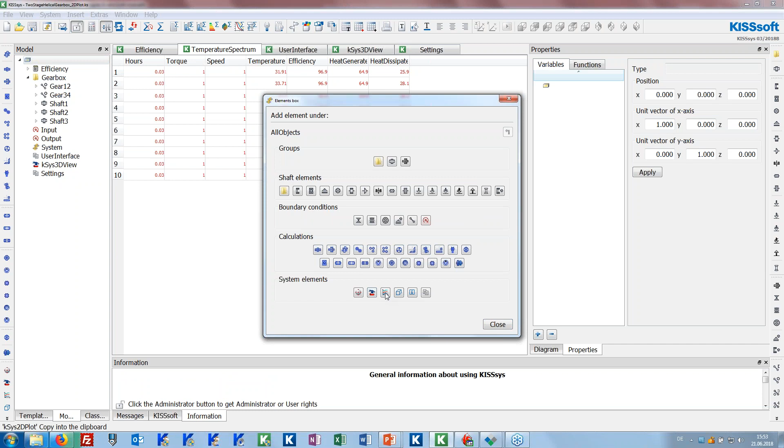So I would like to show you just how this can be done. Normally you don't have this 2D plot element here in the model. I would like to delete it and add it just from scratch from the element box here. You can find the element here next to the 3D viewer, because it's 2D plot. Close it. And first of all, I have to know where these variables are saved.

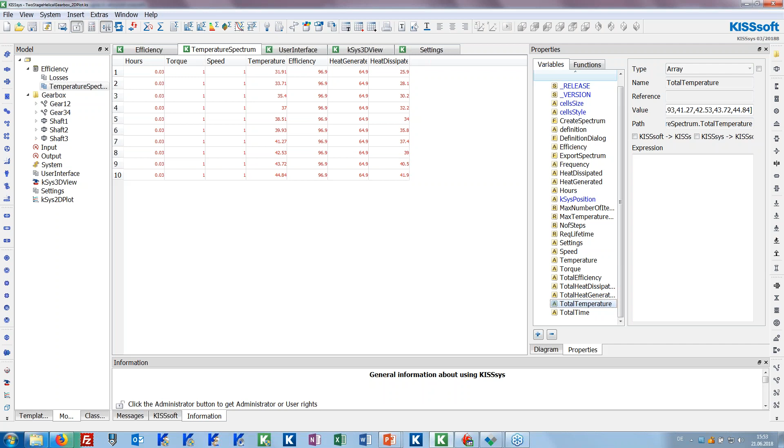And if I do the temperature spectrum calculation, I can find it in the properties window under the variable total temperature here, or total time. So I would like to take the whole variable. I would like to copy it and then go to 2D plot, right mouse click and go to dialog. First of all, you have to do the settings for the plot, which is where you define the title of the x-axis, which is in our case the time in hours actually.

And the y-axis would be the temperature, which is, let's say, in Celsius. We have the option between a logarithmic axis for the x-axis or a logarithmic axis for the y-axis. Let's say use linear. You can also have multiple curves. I just want to show you how you create one.

And then for the x data, this is our time actually. So I don't use the total temperature. I use the total time variable here, which is this array. And here for the y data, I use the total temperature data. And the title is maybe oil temperature over time, for example. That's the title of my graph. Now, let's make it capital. And the color of my line, I would like to have it red.

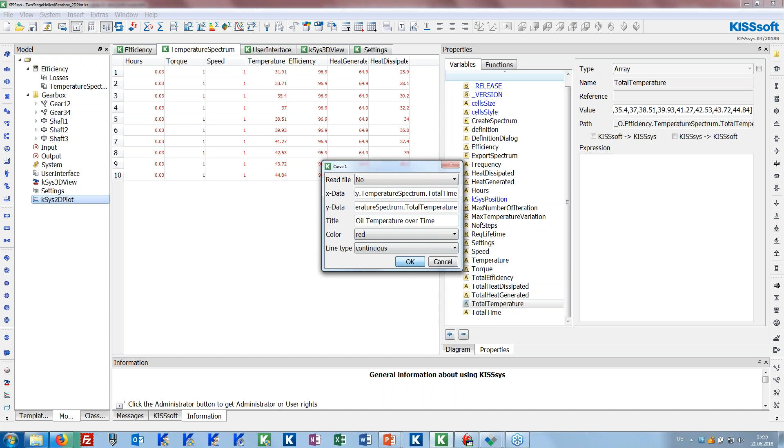And the nice thing here, the motivation, is if I get different results, if I do a different calculation, if I run it again and update the plot, I would see the change directly here, which can be used for documentation purposes in the next step.